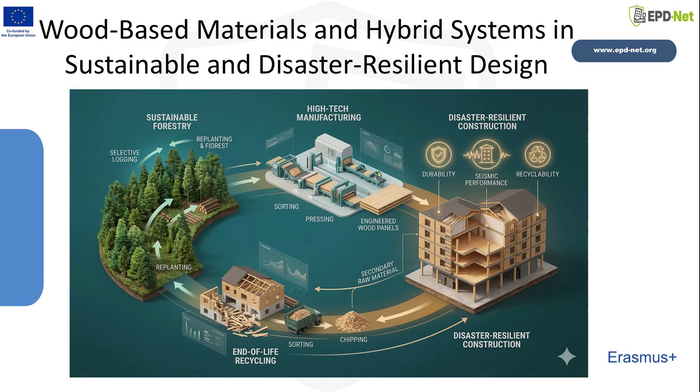In this lecture, we will specifically focus on wood-based panel materials and engineered wood systems. We will examine how these materials contribute to sustainability through recycling, how they perform structurally in seismic regions, and how hybrid systems combining wood, concrete, and steel offer improved performance in disaster-prone areas. The ultimate goal of today's lecture is to develop performance-based material thinking.

In this session, we will move through several interconnected themes. First, we will discuss waste recycling and its contribution to sustainability. This includes how industrial wood waste is transformed into construction materials and how this reduces pressure on natural forests.

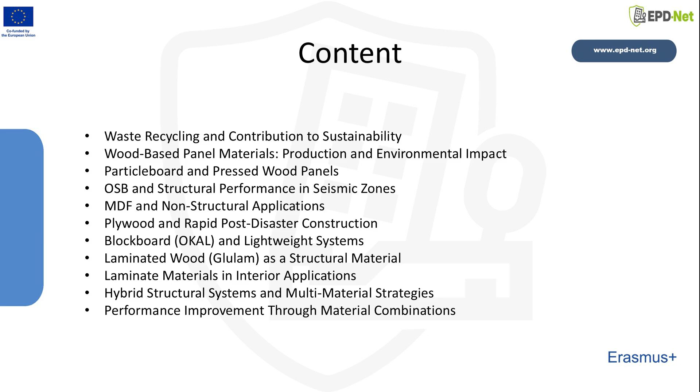Next, we will analyze wood-based panel materials, including particle board, MDF, OSB, plywood, blockboard, and laminated wood, from both environmental and structural perspectives. We will then evaluate how these materials perform in post-disaster temporary housing systems, where speed, lightness, transportability, and structural reliability are essential.

Finally, we will examine hybrid structural systems, combinations of wood, steel, concrete, and glass, and discuss why contemporary architecture increasingly relies on multi-material integration rather than single-material systems.

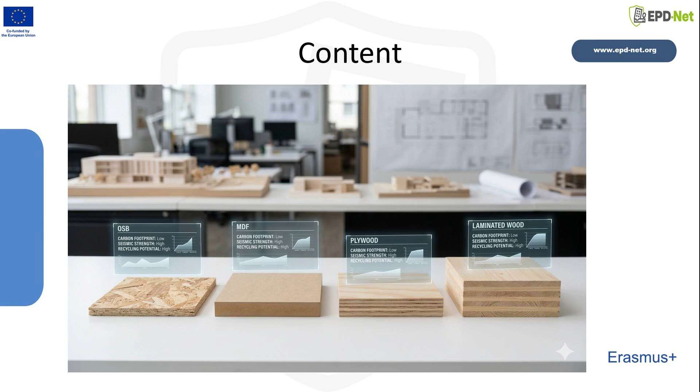By the end of the lecture, you should be able to compare materials not only technically, but also environmentally and structurally. By the end of this lecture, you should be able to explain the environmental significance of recycling wood waste.

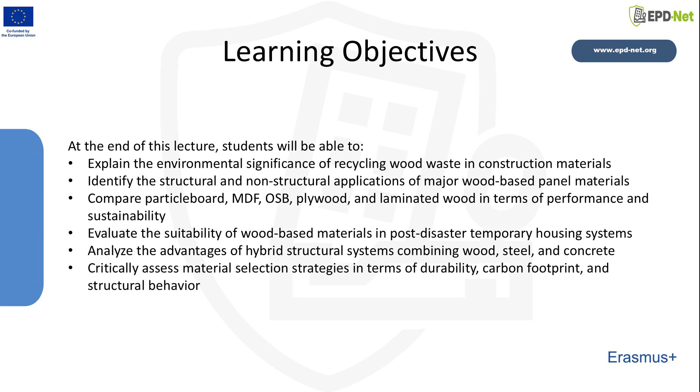You should be able to identify structural versus non-structural applications of panel materials, compare particle board, MDF, OSB, plywood, and glulam in terms of strength and sustainability, evaluate suitability in disaster response architecture, analyze hybrid structural strategies, and critically assess material selection in terms of carbon footprint, durability, and structural behavior.

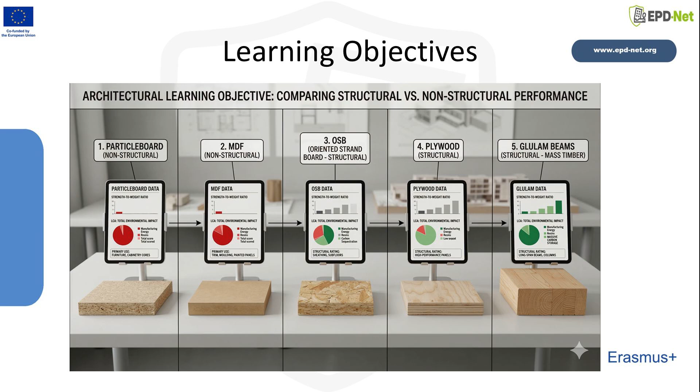Material selection today is no longer only about cost or availability. It is about environmental responsibility, structural safety, lifecycle performance, and resilience. Let us begin with recycling.

Wood waste from furniture production, lumber mills, and demolition sites is often viewed as industrial waste. However, in sustainable construction systems, this waste becomes a valuable resource.

Particle board production is a prime example. Wood chips, shavings, and fiber residues are collected and classified. They are dried to remove moisture, adjusted in size, mixed with resin binders, and pressed under high temperature and pressure. The result is a uniform board ready for finishing.

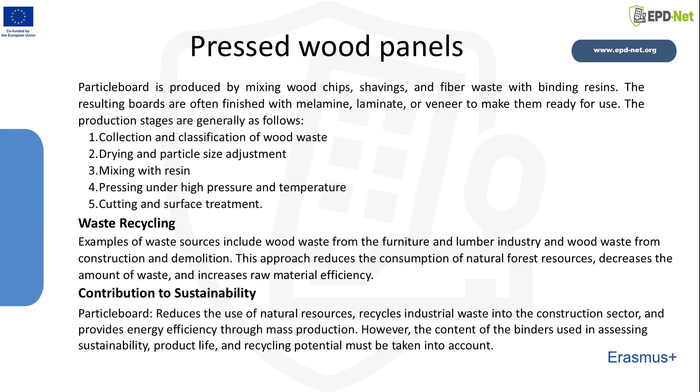This approach contributes to sustainability in three major ways: one, it reduces the demand for virgin timber; two, it minimizes landfill waste; three, it improves raw material efficiency.

However, sustainability must also consider binder content. Synthetic adhesives, especially formaldehyde-based resins, may negatively impact indoor air quality and recyclability. Therefore, sustainability evaluation must always include life cycle assessment, from raw material sourcing to end-of-life recyclability.

Let us now examine particle board in more depth. Particle board is one of the earliest industrially engineered wood panel products. It is produced by compressing wood chips, shavings, and small particles together with synthetic resin binders under high temperature and pressure.

The internal structure of particle board typically consists of three layers: a core layer made of larger wood particles, and two outer layers made of finer particles. This layered system improves surface smoothness while keeping production costs low.

However, because the particles are randomly distributed and not directionally aligned, the internal structural continuity is limited. Unlike plywood or OSB, particle board does not have directional reinforcement. Therefore, its mechanical behavior is isotropic but relatively weak.

Regarding mechanical properties, particle board has low bending strength, limited tensile capacity, weak screw holding performance, and low resistance to cyclic loading. These characteristics make it unsuitable for structural use.

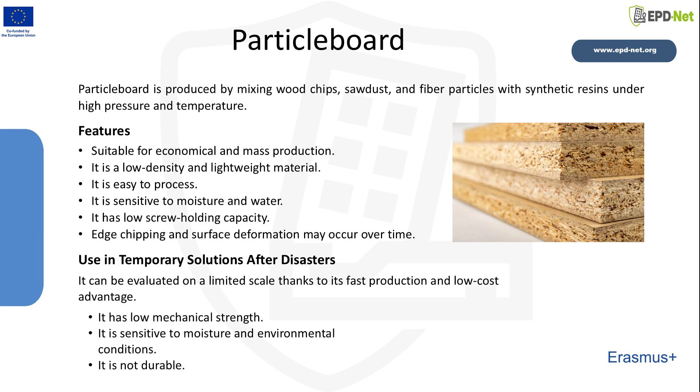Under load, it tends to deform permanently, experience edge breakdown, and lose structural integrity when exposed to moisture. In humid conditions, the board absorbs water, causing swelling and loss of mechanical properties. Once swollen, it does not return to its original strength.

From a sustainability standpoint, particle board has advantages: it recycles industrial waste, it reduces demand for virgin timber, and it supports mass production efficiency.

However, environmental performance depends heavily on the type of resin used, including formaldehyde emissions and end-of-life recyclability. Because it contains synthetic binders, it is difficult to recycle after use. Therefore, its sustainability is conditional, not absolute.

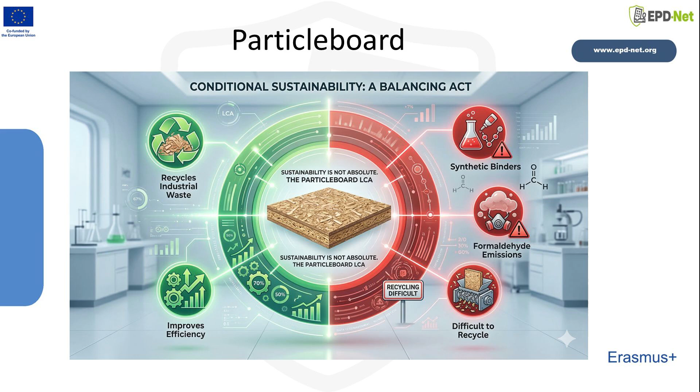Regarding use in disaster context, in post-disaster housing, particle board should only be used in temporary interior furniture and non-load bearing surfaces. It should not be used in structural walls, floor systems, or exterior panels. In summary, particle board is economically efficient but structurally limited.

Now let us examine OSB more technically. OSB is an engineered panel composed of long, thin wood strands arranged in oriented layers. The orientation is deliberate: outer layers aligned in one direction, inner core oriented perpendicular. This design mimics the structural logic of plywood but uses larger strands instead of veneers.

Regarding structural behavior, because of its directional strand orientation, OSB exhibits high in-plane shear strength, improved bending capacity, strong fastener holding capacity, and resistance to cyclic loading. In seismic engineering, OSB is commonly used as a shear wall diaphragm in timber framing systems.

When lateral forces act on a building, OSB panels distribute forces evenly, increase stiffness, and improve structural stability.

Its lightweight is a major advantage. Since seismic force equals mass times acceleration, reducing mass directly reduces seismic demand. OSB performs well under vibration and cyclic loads, which makes it particularly suitable for earthquake-prone regions.

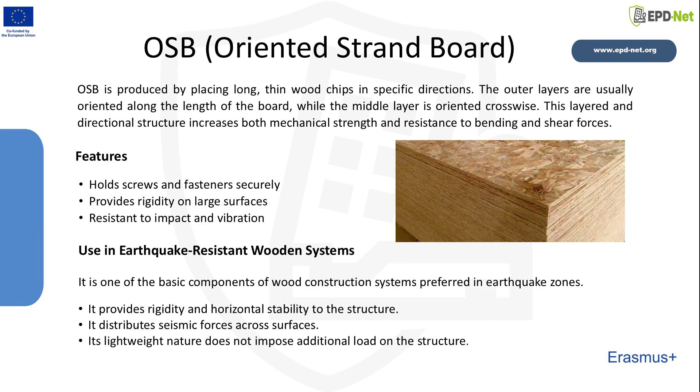It also provides impact resistance and surface rigidity. Environmental considerations: OSB uses fast-growing wood species and wood waste strands, making it relatively resource efficient. Compared to concrete or steel, it has lower embodied energy and carbon storage potential. However, adhesives still affect recyclability.

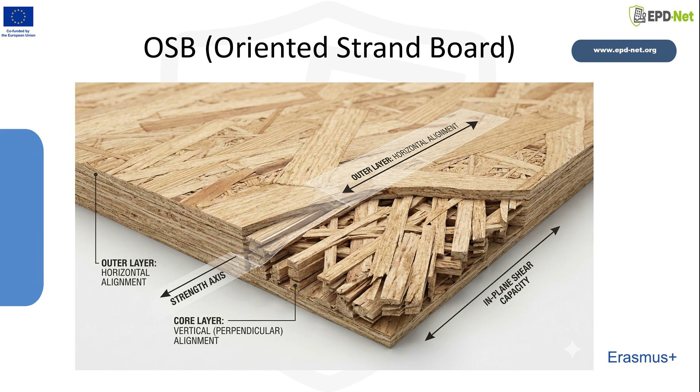Use in disaster-resilient systems: in post-disaster construction, OSB is ideal for shear walls, floor decking, and roof sheathing. It supports modular, prefabricated construction systems. Among panel materials, OSB represents a strong balance between cost, performance, and sustainability.

OKAL board, or blockboard, is a lightweight panel typically consisting of a core made of wood strips or particles with surface veneers. Its defining characteristic is low structural capacity. OKAL panels have limited bending strength, are not designed for load bearing, and may deform under long-term loading. Because of the discontinuous core structure, stress transfer is not efficient.

Advantages: despite structural limitations, OKAL board offers easy transportation, simple installation, reduced structural load, good thermal properties, and interior use. It is frequently used in exhibition systems, interior partitions, and temporary office modules.

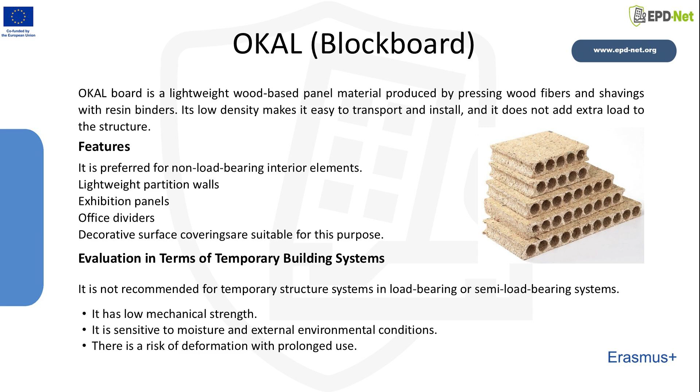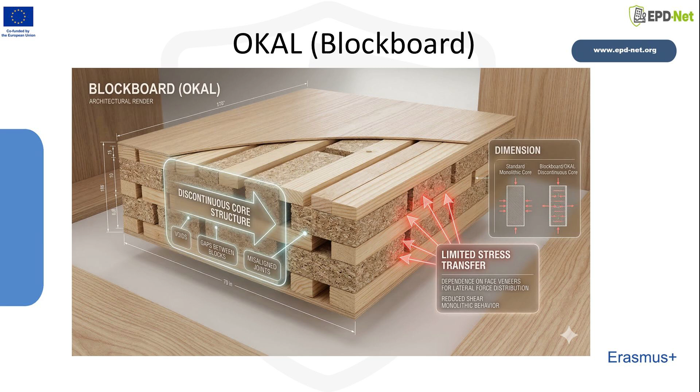Disaster context: in temporary shelter systems, OKAL board is suitable only for interior partition walls and light separation elements. It should not be used in structural frames or exterior exposed surfaces. Moisture sensitivity remains a concern. Thus, OKAL board is spatially flexible but structurally limited.

MDF differs significantly from particle board in internal structure. It is made from wood fibers reduced to near dust form and bonded under high pressure. This results in a homogeneous internal structure.

Surface and fabrication quality: MDF's greatest advantage is surface performance, smooth and uniform texture. Excellent for painting and lacquer. Ideal for CNC detailing and clean edge machining. It allows precise interior architectural detailing.

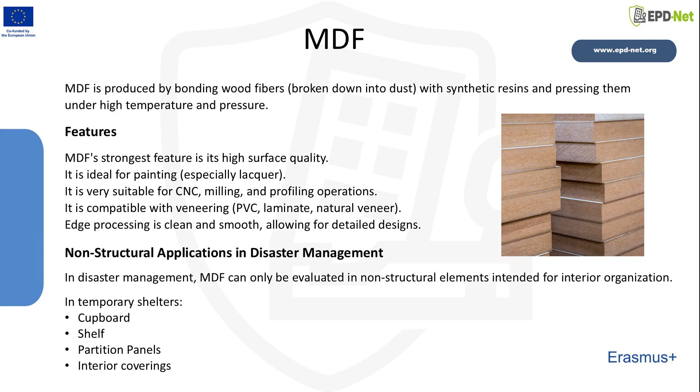Structural limitations: despite surface quality, MDF has low bending resistance, is extremely moisture sensitive, and loses structural strength when wet. Because of fiber density, it absorbs water rapidly. In humid climates or disaster conditions involving flooding, MDF performance deteriorates quickly.

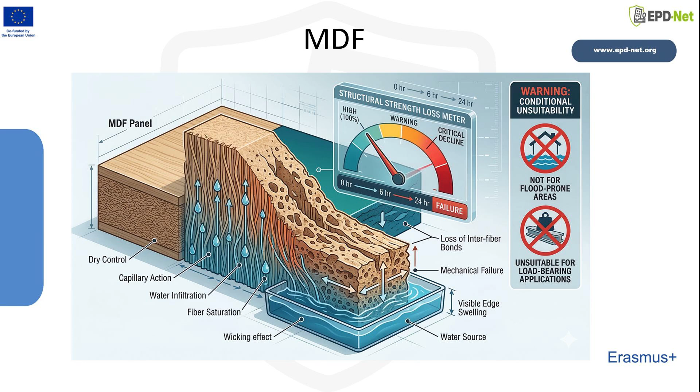Disaster management role: MDF can only be used for interior furniture, storage systems, and non-structural partition panels. It cannot serve in load-bearing applications. From a sustainability perspective, frequent replacement due to moisture reduces its long-term environmental value.

Let us now examine plywood in greater structural and architectural depth. Plywood is an engineered wood panel composed of thin wood veneers bonded together, with adjacent layers arranged perpendicular to one another. This cross-laminated configuration is the key to its mechanical strength.

Unlike particle board or MDF, plywood benefits from directional grain reinforcement. Each layer resists movement in one direction, while the adjacent layer resists movement in the perpendicular direction. This significantly reduces dimensional instability such as warping, cracking, or splitting.

Mechanical performance: because of its layered cross-grain system, plywood exhibits high bending strength, improved tensile capacity, good shear resistance, enhanced dimensional stability, and better fastener holding compared to particle board. The perpendicular layering interrupts crack propagation, which increases durability under stress.

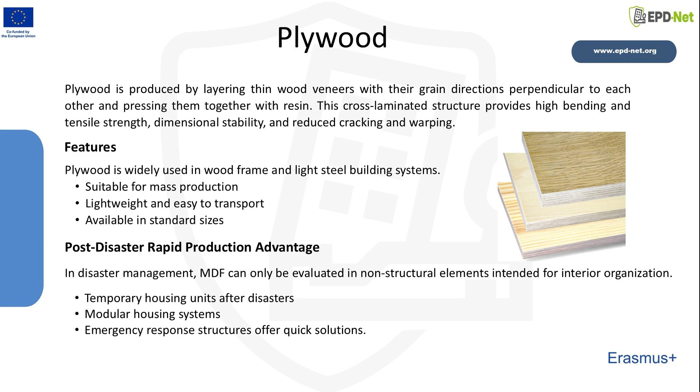In structural applications, plywood is often used as floor sheathing, roof decking, shear wall panels, and structural diaphragms. It behaves predictably under load, making it suitable for structural design calculations.

Performance in seismic regions: plywood is particularly important in earthquake-resistant timber systems. It performs well because it provides lateral stiffness, distributes horizontal seismic forces, improves energy dissipation, and adds minimal structural mass.

Lightweight systems reduce seismic forces. Since earthquake force is proportional to mass, plywood-based structures benefit from reduced inertia. This makes plywood highly suitable for disaster-prone areas.

Rapid construction and post-disaster use: one of plywood's greatest advantages is speed. It is manufactured in standardized sizes, easy to transport, simple to cut and assemble, and compatible with prefabrication. In post-disaster scenarios, time is critical.

Plywood enables temporary housing units, modular shelters, and emergency response buildings. It balances structural performance, speed, and resource efficiency. From a sustainability perspective, plywood also stores carbon during its service life.

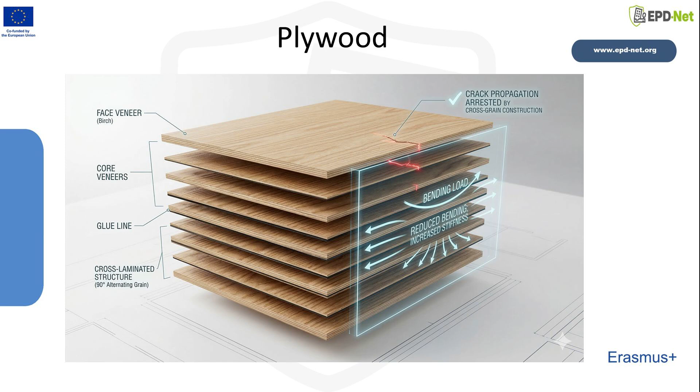Contrabass is a decorative surface panel consisting of a plywood base with a thin veneer surface. The structural behavior is controlled by plywood. This raises the distinction between structural versus aesthetic role.

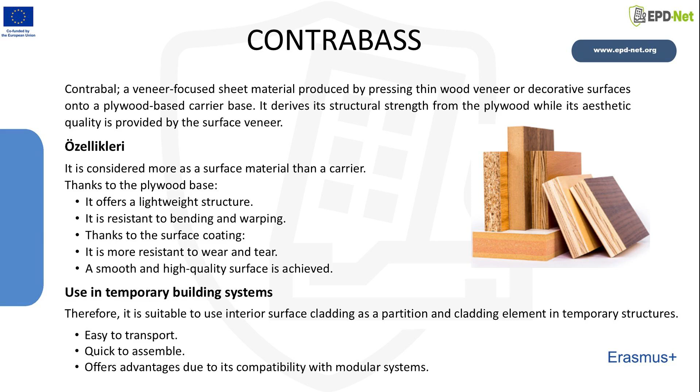The plywood base provides bending strength and dimensional stability. The veneer surface provides visual quality, wear resistance, and architectural expression. It combines structural efficiency with aesthetic refinement.

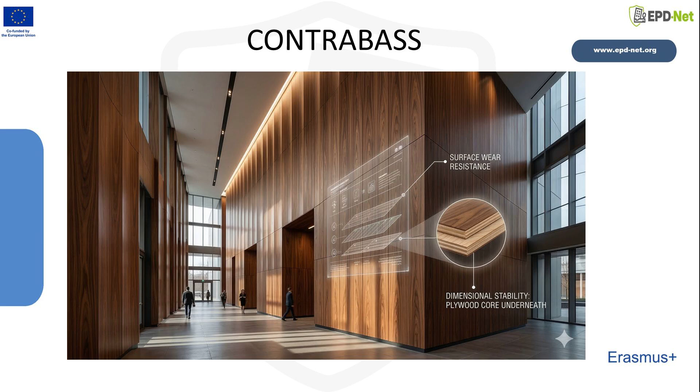Modular and temporary use: in temporary structures, contrabass is effective for interior cladding, modular partition systems, and lightweight assembly. It is easy to transport and assemble, making it suitable for rapid deployment. However, it remains a surface system, not a structural frame.

Durability is directly linked to sustainability. A material that lasts longer reduces embodied carbon over time. Now, moisture sensitivity comparison.

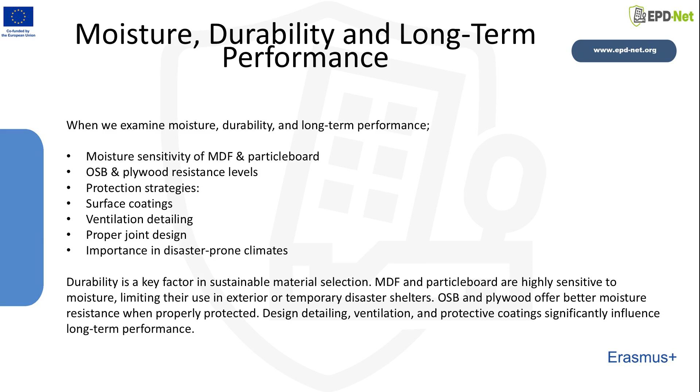MDF and particle board have a high swelling coefficient and rapid strength loss. OSB and plywood show moderate moisture resistance, improved with surface treatments. Glulam requires protective detailing but performs well when properly sealed.

Design strategies for moisture protection: architectural detailing is critical, including elevation above ground, ventilation gaps, protective coatings, and drainage detailing. Material selection alone is insufficient without proper detailing.

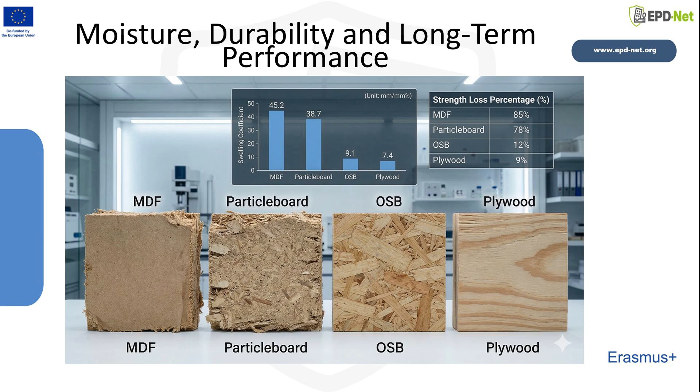Climate and disaster considerations: in flood-prone regions, moisture resistance becomes decisive. In seismic regions, lightweight materials reduce structural mass. In fire-prone areas, controlled charring behavior becomes important. Durability must be evaluated within environmental context.

In this slide, we move from panel materials toward structural engineered timber, specifically glulam, or glued laminated timber. Glulam is produced by bonding dried timber lamellas together with high-strength structural adhesives. The grain direction of each lamella is aligned parallel to the others.

This alignment is extremely important because wood is anisotropic, meaning its strength properties vary depending on fiber direction. By controlling fiber orientation,

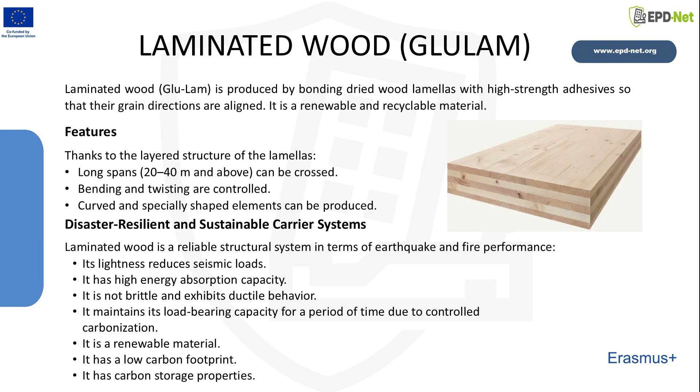glulam maximizes strength along the structural axis. One of the most important engineering advantages of glulam is defect control. Natural solid timber contains knots, cracks, density inconsistencies, and fiber deviations. During glulam production, defective segments are removed. Lamellas are strength graded, moisture content is standardized, and layers are assembled strategically. This results in a material that is stronger and more predictable than solid timber.

Another key advantage is its strength-to-weight ratio. Compared to reinforced concrete, glulam is significantly lighter while still capable of spanning 20 to 40 meters or more. This makes it ideal for sports halls, airports, cultural buildings, industrial halls, and emergency assembly structures.

Additionally, glulam allows curved geometries. Unlike steel or concrete, which require complex formwork or bending processes, glulam beams can be fabricated in curved shapes during production. This provides architectural flexibility while maintaining structural efficiency.

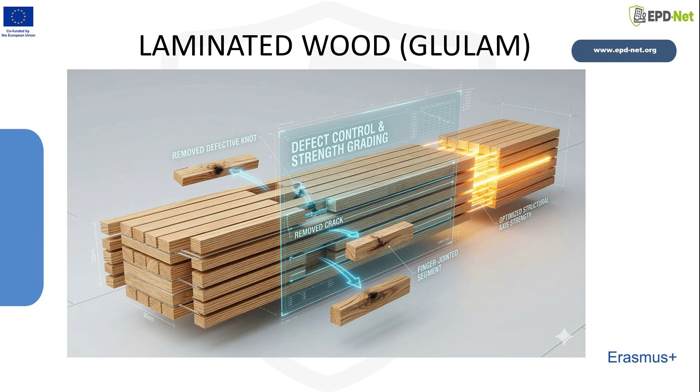From a sustainability perspective, glulam is renewable, recyclable, and acts as a carbon storage medium. During tree growth, carbon dioxide is absorbed from the atmosphere and stored in the wood fibers. When used structurally, this carbon remains sequestered for decades. Thus, glulam is not only a structural material, it is also a climate-responsive material.

When comparing materials: particle board has low structural capacity. MDF is for interior use only. OSB has good seismic suitability. Plywood has high structural reliability. Glulam has excellent structural and environmental performance. This matrix demonstrates that material selection must be performance-driven.

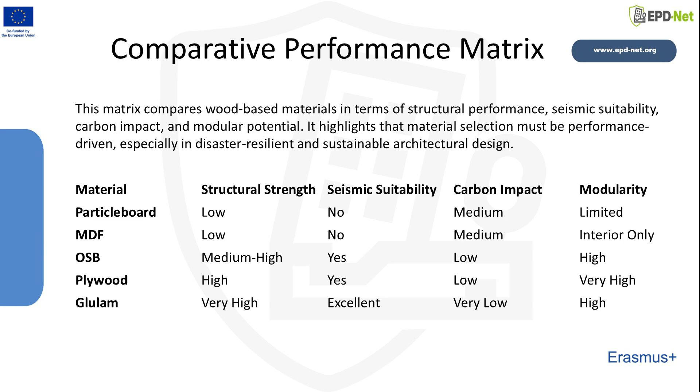Additionally, glulam allows curved geometries. Unlike steel or concrete, which require complex formwork or bending processes, glulam beams can be fabricated in curved shapes during production. This provides architectural flexibility while maintaining structural efficiency.

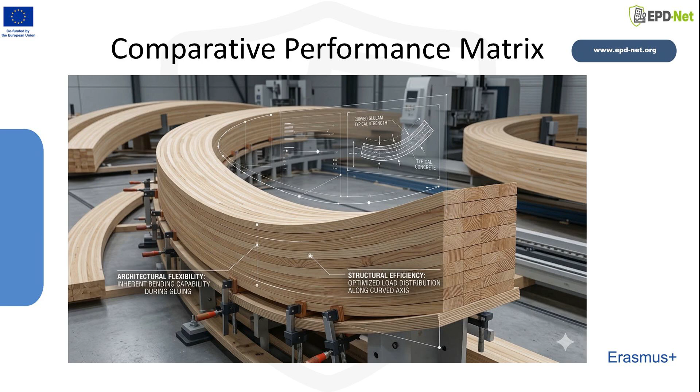From a sustainability perspective, glulam is renewable, recyclable, and acts as a carbon storage medium. During tree growth, carbon dioxide is absorbed from the atmosphere and stored in the wood fibers. When used structurally, this carbon remains sequestered for decades. Thus, glulam is not only a structural material, it is also a climate-responsive material.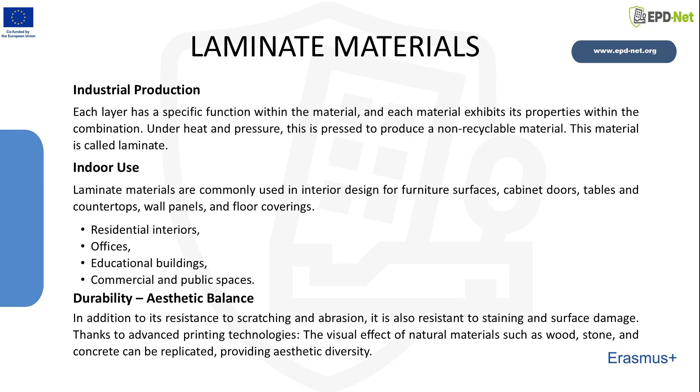Laminate is widely used in furniture surfaces, cabinet doors, countertops, wall panels, and flooring systems. Its primary advantages include high abrasion resistance, scratch resistance, stain resistance, and impact resistance. Technological advancements in digital printing allow laminate surfaces to imitate natural materials such as wood, stone, marble, or concrete.

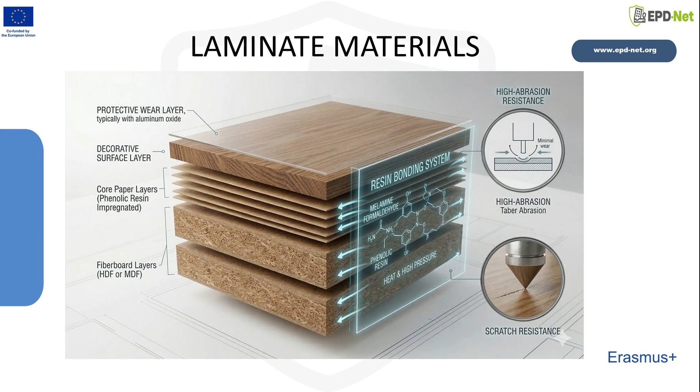However, from a sustainability perspective, laminates have limitations. Thermoset resins prevent recycling. Adhesive content increases embodied energy. End-of-life separation is difficult. Thus, laminate materials provide durability and aesthetic flexibility, but life cycle analysis must be considered carefully.

Now let us shift from structural behavior to environmental evaluation. Life cycle assessment, or LCA, is a methodology used to measure the total environmental impact of a material throughout its entire lifespan. LCA stages follow.

When evaluating wood-based materials, we examine: 1. Raw material extraction. 2. Production energy consumption. 3. Transportation. 4. Service life and durability. 5. End-of-life recyclability. 6. Carbon storage potential. This comprehensive approach allows us to compare materials objectively.

Comparing wood versus concrete versus steel: engineered wood products generally show lower embodied energy than concrete, and lower embodied carbon than steel. Carbon sequestration benefits: trees absorb carbon dioxide during growth, and when used in buildings, that carbon remains stored for decades. However, the environmental impact of adhesives and synthetic binders must be considered, as these chemicals may reduce recyclability and introduce emissions.

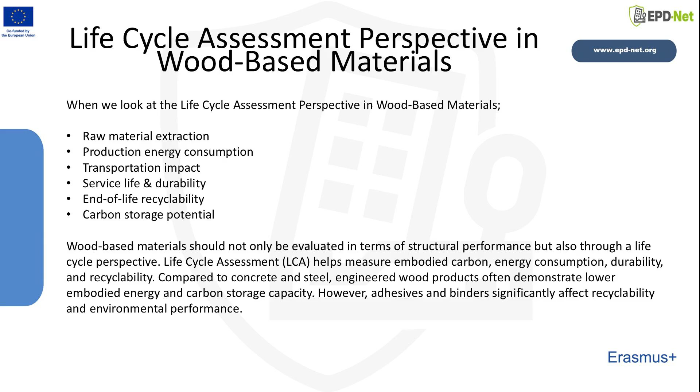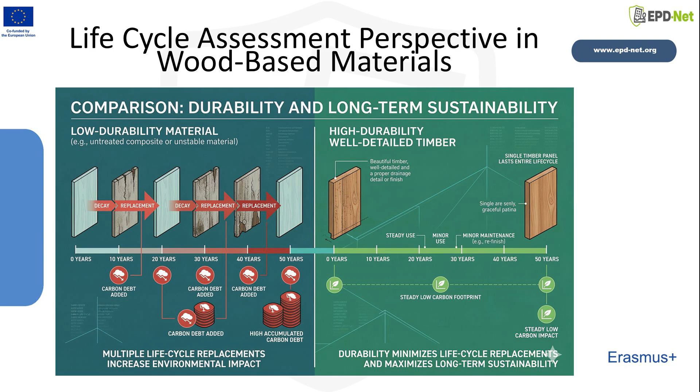Therefore, the sustainability of wood-based materials is strong but conditional. Durability is a key sustainability factor. A material with low embodied carbon but short lifespan may not be sustainable. Durability directly affects life cycle performance. If replacement frequency increases, total carbon footprint increases. Thus, sustainable design requires balancing initial embodied energy, long-term performance, and maintenance requirements.

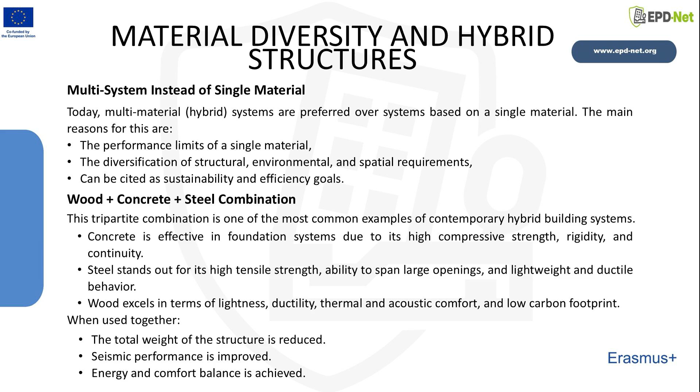Modern architecture increasingly favors hybrid systems. Reasons include single material limitations, diverse structural requirements, and sustainability goals. Wood plus concrete plus steel combinations reduce total structural weight and improve seismic performance while balancing energy and comfort.

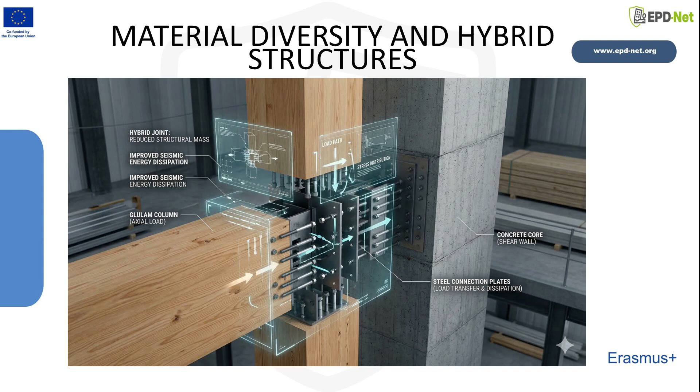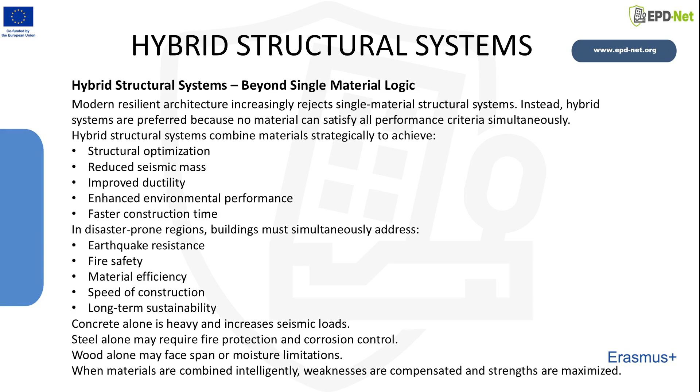Modern construction increasingly relies on hybrid systems rather than single material solutions. Why? Because no single material can optimize all structural, environmental, and spatial requirements simultaneously. Concrete performs excellently in compression but poorly in tension. Steel performs excellently in tension but requires corrosion protection. Wood is lightweight and sustainable but has span limitations. Hybrid systems strategically combine materials to compensate for weaknesses and maximize strengths.

Hybrid systems improve structural efficiency, material optimization, seismic behavior, energy performance, and architectural flexibility. This shift toward multi-material integration reflects a performance-driven design philosophy.

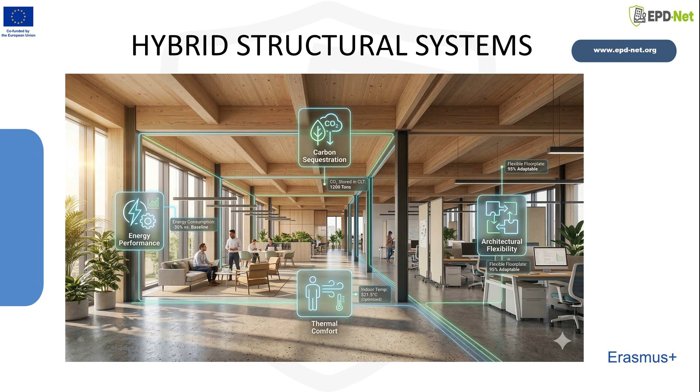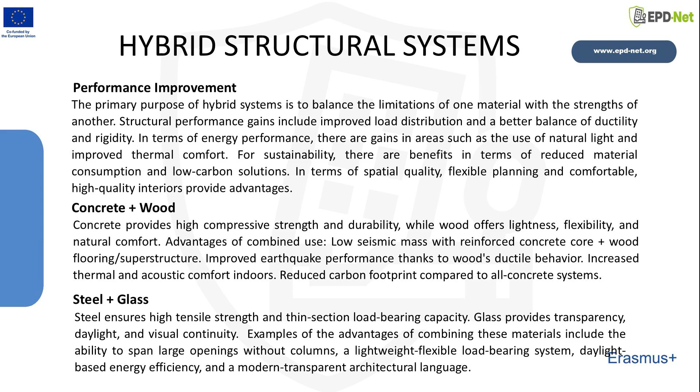Concrete cores combined with timber superstructures are increasingly common in mid-rise buildings. The reinforced concrete core provides vertical circulation support, lateral stiffness, and fire-protected structural stability. The timber floors and beams provide reduced structural mass, faster assembly, and improved indoor comfort. From an earthquake engineering perspective, this combination lowers seismic mass while maintaining stiffness.

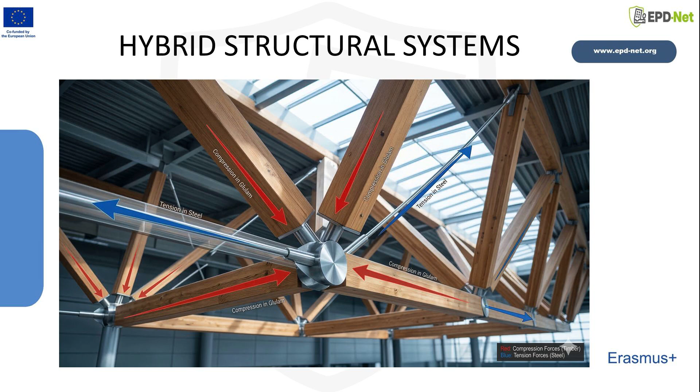From an environmental perspective, substituting concrete floors with timber elements significantly reduces embodied carbon. This hybrid strategy balances structural safety and sustainability.

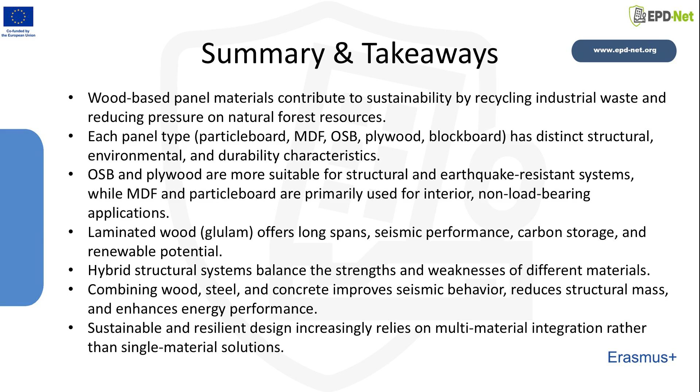To summarize, wood-based panels contribute to sustainability through recycling. Each panel type has distinct structural and environmental characteristics. OSB and plywood perform well in seismic systems. MDF and particle board are interior materials. Glulam offers long-span sustainable structural solutions. Hybrid systems enhance seismic performance and reduce carbon footprint. Sustainable architecture increasingly relies on multi-material integration.